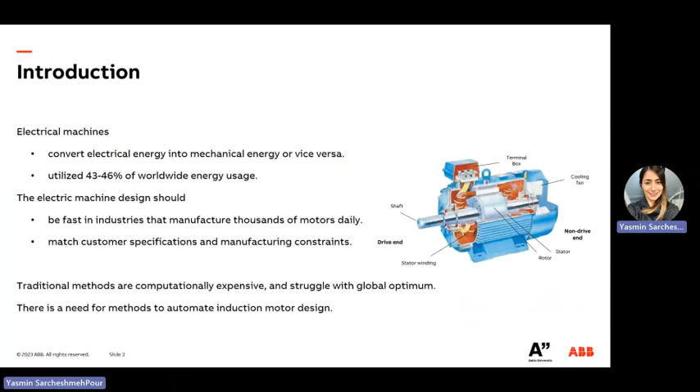The research questions of this thesis are: how can we use RL to find the optimal machine designs? The second question is how can we use the performance metrics and the cost functions to design a proper reward function? And the final question is how does this proposed method work compared to existing traditional methods in terms of efficiency and design quality?

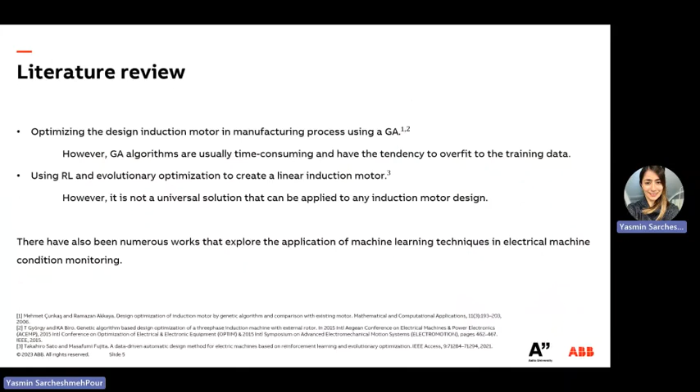There have been some works done in this area, but most of them have been using genetic algorithms, and there has also been one work which used a reinforcement learning and evolutionary optimization method to create a linear induction motor. However, these methods have some problems: some of them are time consuming and have a tendency to overfit to the training data, and the reinforcement learning work with the evolutionary optimization also has the problem that it's not a universal solution. There have also been some works that explore the application of machine learning techniques in electrical machine condition monitoring, but there has not been any work related to designing the electrical machines.

Electrical machine design is a parameter optimization problem in which the objective function corresponds to the mass of the motor, and we have the design variables in this work. They are length, coil turns, and rotor tooth tip height of the motor. Additionally, we have the user-specific and manufacturing requirements that are formulated as equality and inequality constraints.

Usually, engineers select a base machine that is very close to the user-specific requirements and manufacturing constraints. Then, either manually or deterministically, they adjust some important design parameters, and finally, they will do some further optimizations to fine-tune the design. Unfortunately, this process is time-consuming and can affect the sales negotiation.

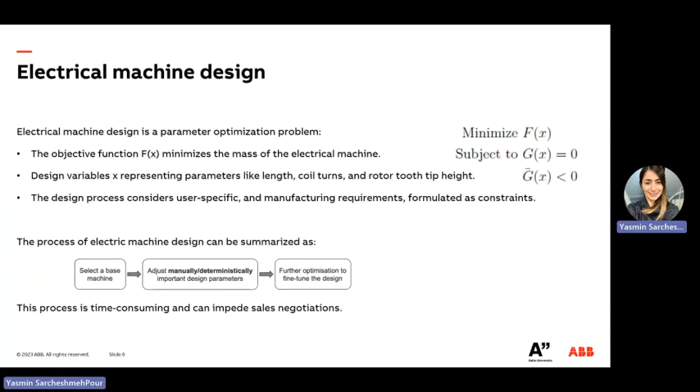In order to be able to use reinforcement learning for designing electrical machines, we need to have a simulation environment which the reinforcement learning agent can interact with. So for designing the electrical machine design game, we have some performance metrics such as rotor tooth tip height, air gap flux density, starting current, starting torque, and stator temperature rise.

And based on these performance values, we are defining some performance flags in which the value of each flag could be either 1, 0, or -1. If the corresponding performance value of the flag meets the user-specific requirements and the manufacturing constraints, the flag value is 0, otherwise it's 1 or -1. Therefore, a machine design can be considered feasible if and only if its flags are equal to 0.

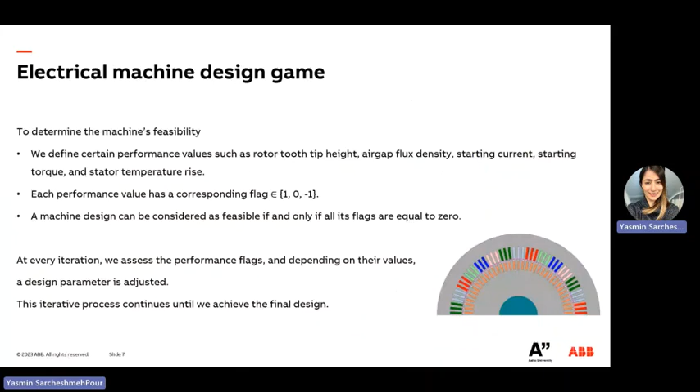So at each time step, we assess the performance flags, and depending on their values, we decide to adjust a design parameter. Then we will end up at a new state, and the new state has the new performance flags, and we continue this process until we achieve the final design.

Designing electrical machines is challenging because it's a multi-objective optimization. It has a high-dimensional design space. The simulation is time-consuming and costly, and we have access to limited data and expert knowledge. Additionally, designing electrical machines requires balancing different factors, and there are a lot of trade-offs among these factors.

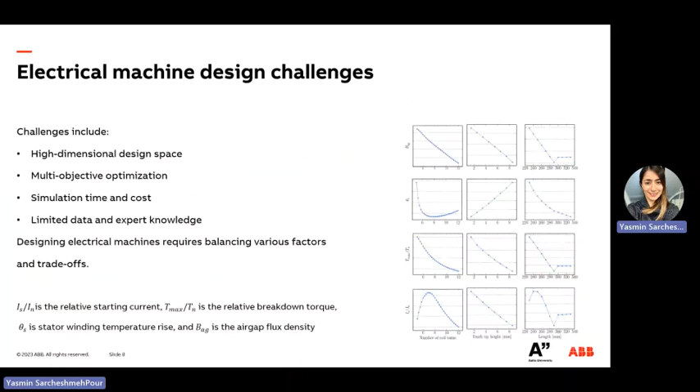For example, here we have the design parameters, number of coil turns, tip height and length of the motor, and we have the performance metrics here. So you can see how increasing each of the design parameters affects the performance value. And there are some interconnections between these performance values, and changing each design parameter doesn't have the same effect on each of the performance values.

So reinforcement learning is the method that we are using to automate the design of electrical machines. Basically, reinforcement learning has 5 key elements, which is the environment, that is the game in which the agent is interacting with. It has a state, action, reward, and also the policy.

In our simplified problem, actions are decreasing or increasing each of the design parameters, and the states are flag values along with the previous action. In this work, we are using Proximal Policy Optimization as the reinforcement learning method, and the process of designing electrical machines using reinforcement learning starts with defining design parameters, create the simulation environment, define reward function, train the reinforcement learning agent, and evaluate the optimized design.

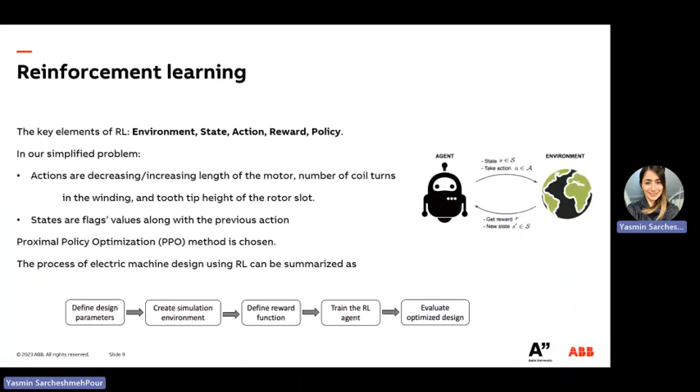So far, we have defined the design parameters and the simulation environment, and then we need to define the reward function, which is the main contribution of this thesis. In this work, we have proposed 3 different reward functions. We are going to start with the simple reward function, in which we are not using any human expert engineering knowledge. As I mentioned, a feasible machine design is the one in which all the performance flags are 0. Therefore, the simplest way to design the reward function is to consider the number of 0 flags.

Therefore, in this simple reward function, we have flags reward function in which we are calculating the difference between the current 0 flags and the previous 0 flags. This flags reward function has some properties of a good reward function, and it does not have some of them. For example, it's aligned with the task objective, easy to compute, but it's not consistent with the goal. It does not encourage exploration, and it's not general enough. Therefore, we need to add some properties to this reward function in order to make it better. For example, here is also a simple failure case that the agent wasn't able to find a solution only based on this flags reward function.

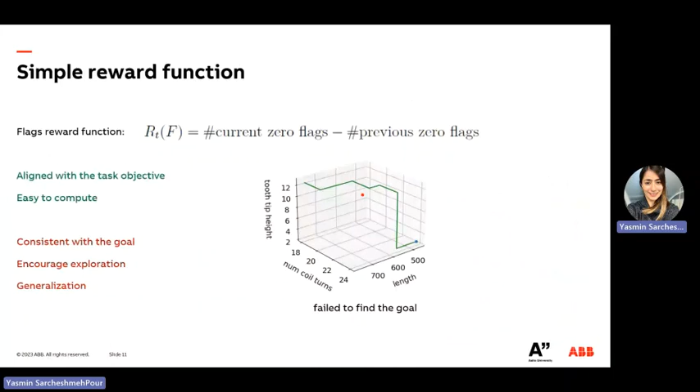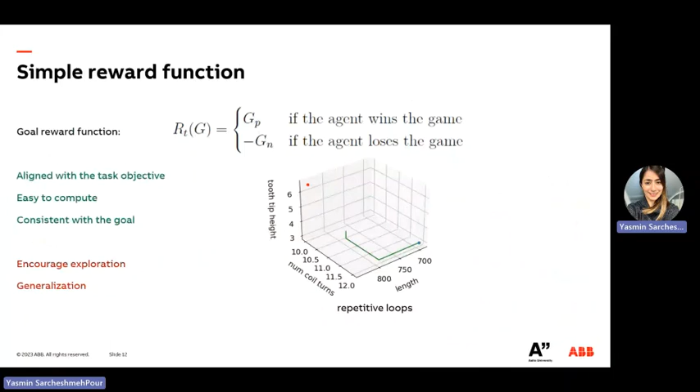So one component that we need to add to the reward function is the goal reward. It will add the consistency with the goal to the reward function properties. It works in a way that we are giving the agent a huge reward if the agent wins the game, and we give it a huge penalty if the agent loses the game. Although this reward function is good, there's a problem that the agent will get stuck in repetitive loops, and we need to somehow solve this problem. In order to solve this problem, we are adding some penalty to the reward function if the agent sees a state that already has been seen during the training.

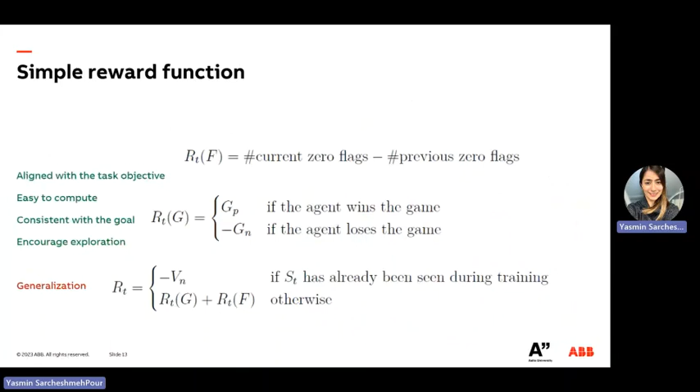So the final reward function would be like this. We have the flag reward function, goal reward function, and also the visiting penalty. This reward function has almost all the properties of a good reward function. However, it cannot be generalized. Therefore, we need to design another reward function which has the engineering knowledge in it.

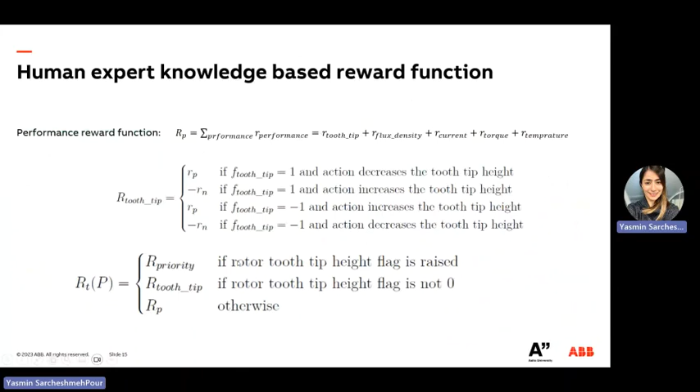So the second reward function is the human expert knowledge-based reward function, in which we are considering the value for each performance metric. Therefore, this performance reward function consists of the individual rewards for each performance value, and there are some priorities among these performance values in the electrical engineering concepts. So we are considering those priorities in the performance reward function as well, and the final performance reward function looks like this, in which the rotor tooth tip height flag has the highest priority.

In addition to the performance values, we also have the relative starting current requirement, in which in some of the designs we have a target relative starting current requirement that limits the nominal starting current of the induction machine. Therefore, we are adding a reward function related to this relative starting current requirement, and the final human expert knowledge-based reward function looks like this, that it has the same goal reward as the previous reward function and the flags reward. Additionally, it has the same visiting penalty, and the difference is that we are adding this performance reward function along with the relative starting current reward function.

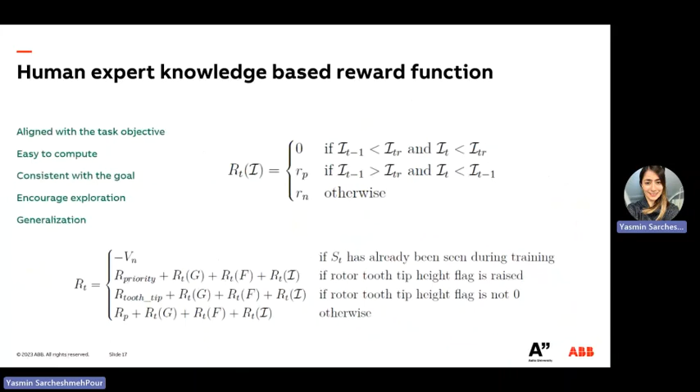So this reward function has all the properties of a good reward function, that it's aligned with the task objective, easy to compute, consistent with the goal. It encourages exploration, and it also has a good generalization. However, it has the engineering knowledge, and it would be really good if we can also have another reward function in which there is no engineering knowledge injected.

So the final reward function is the distance reward function, in which there is no engineering knowledge injected. In the distance reward function, we have a training set, and there is a database that contains the goal states of the training machines. So in each game, we have the goal state of that game, and at each time step, we are at the current step.

The reward function is designed in a way that at each time step we are calculating the distance of the current step to the goal state, as well as calculating the distance of the previous state to the goal state. And then if we moved closer to the goal, then we are giving the agent a positive reward. Otherwise, if we went far from the goal, we are giving the agent a negative penalty.

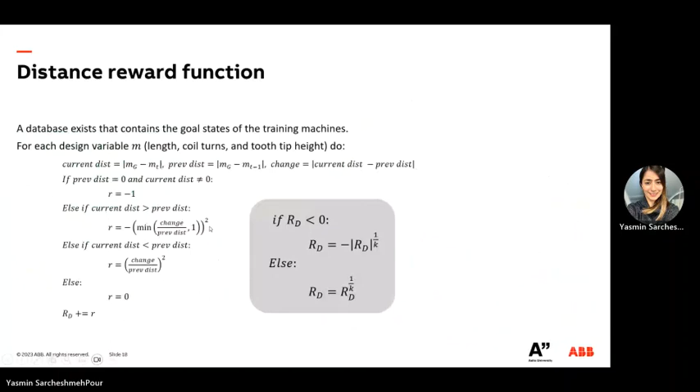So here for the simple reward function, we have started with only 1 seed, so we train the agent only in 1 case. Here is the result for that case. So the blue point is the starting point and the red point is the target point. The yellow path shows the reference solution, which is the traditional design method, and the green line shows the reinforcement learning path.

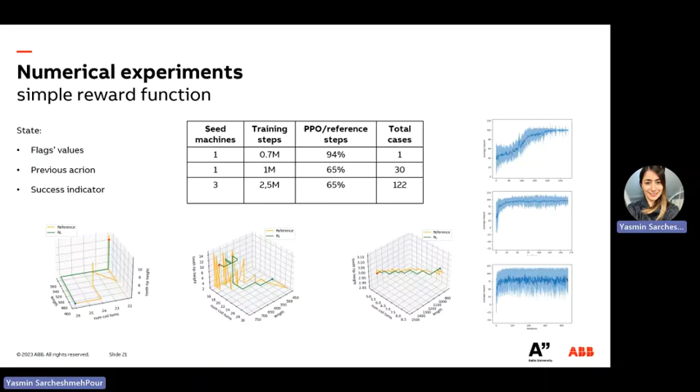However, if we wanted to scale the training set to more than 100 cases, this reward function was not able to find the solution for all the cases. So we moved to the human expert knowledge-based reward function, and we started with 122 cases. And the agent was able to find a solution for all of the cases, but then when we wanted to scale it to about 400 cases, with the previous state definition, the agent was not able to find a solution for all the cases, so we had to come up with a new definition for the observation space.

So the complex observation space is this: we have added some of the performance values to the state space, so that the agent has access to the plain values in order to be able to decide better. Here are examples of the failed cases for the simple observation space for the human expert knowledge-based reward function. As you can see, adding these performance values to the observation space decreased the number of needed training steps.

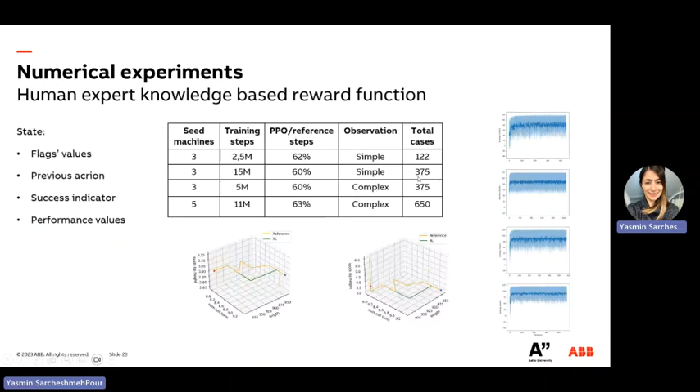And also here, PPO/reference steps means how many reinforcement learning steps it took to find the solution for all the 375 cases compared to the total reference steps.

And finally, we have the distance reward function, in which we have trained the agent for a total number of 650 cases. As you can see, the distance reward function has almost the same number of steps as the human expert knowledge reward function. However, it has more training steps, which means that for the human reward function, we injected the knowledge, so it makes sense for it to have fewer steps.

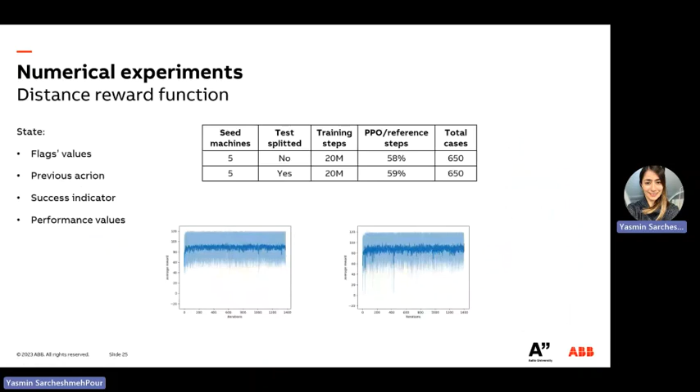Additionally, we have split the training set into test and train sets, and we randomly selected 20% of the electrical machine games into the test set, and you can see that this reward function was able to generalize and find the solution even for the unseen cases.